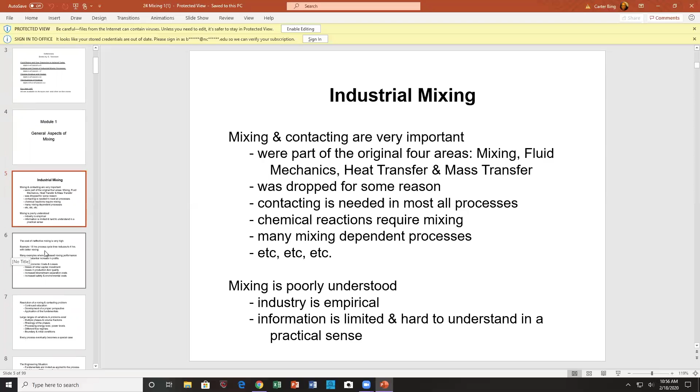The cost of ineffective mixing is very high. I ran a consulting job where they had an 18-hour cycle time. In that cycle, there were 2 powder additions to a liquid, and after they added the powder, they had lumps. It took 8 or 10 hours to get rid of those lumps.

Once they got rid of those lumps, further on down in the procedure, they added more powder and made lumps again, taking 4 hours to get rid of those. So overall, you had a substantial amount of time spent getting rid of lumps. The whole concept is: you don't make the lumps in the first place. You get the right equipment for the job, and you feed the particles in such that there's no way they can form lumps.

The company recognized this problem, and also recognized that they had to change their procedures and phase in new methods for adding powder to a liquid without lumps. It took them about 2 years to do that, which I find very astonishing. But they reduced their cycle time from 18 hours down to 4 or 6 hours or so.

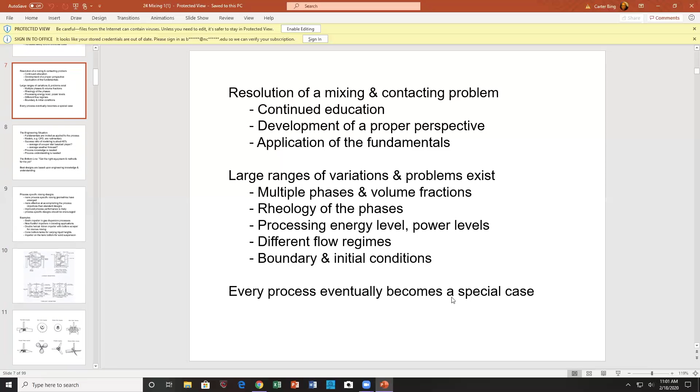So when you have this variation due to the lack of knowledge or information, every process eventually becomes a special case. Now that's counterintuitive, right? You want to have generality. But no, indeed, everything is a special case.

In an engineering situation, fundamentals are limited as applied to the process. The process is not well understood. You have CFD. CFD is fantastic. Don't get me wrong, I'm a great believer in CFD. But you can use CFD to understand your process.

That's true, but you can calculate a whole bunch of stuff that you can't measure. And actually, what you do with those calculations is the question. You have so much information, you don't know which is important and which is not.

Anyway, I used to say that the models are rudimentary. Maybe they're not that bad anymore. I would contend that the success ratio of modeling is about 40%. The average weather forecast—I don't know if you've tracked it or not—is about 40%, or take a look at a superstar baseball player batting 300, 1 out of 3. So even the best of the best, considering how much time and effort has been spent in predicting the weather and the computational capabilities, they're only coming up with 40%.

So process knowledge is needed, okay? And one of the ways of gaining knowledge is CFD. The other way is you go out and study it experimentally. And hopefully you go beyond knowledge and reach a level of understanding. Process understanding is necessary, is needed.

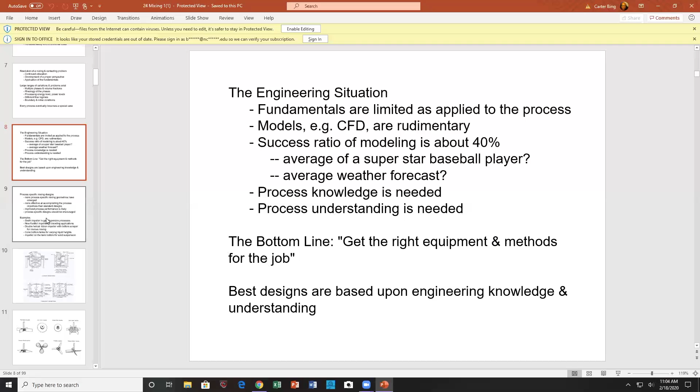Now this has given rise to process-specific mixing designs. They have emerged and are quite beneficial in increasing production or profits, effective at accomplishing the task objectives over and above the standard designs. Improved process performance is likely. Process-specific design should be encouraged.

What this is directed at is you have the concept out there of geometrically similar systems. Well, using geometrically similar systems, what you do is fall into a trap. Geometric similarity is a trap. Basically, you look at design.

There's two major elements to a design. One is energy level, or energy input, or operating conditions—that's one group of things. The other group is geometry. Geometry is very key in design. In fact, design effort to determine the proper geometry is very, very important.

So if you're looking for the proper geometry, then you cannot use geometric similarity. If you use geometric similarity, you have basically cut out a major design variable by fixing the geometry. Anyway, geometric similarity is taught everywhere—in the undergraduate program and all the fluids courses, you have geometric similarity, dynamic similarity, kinematic similarity.

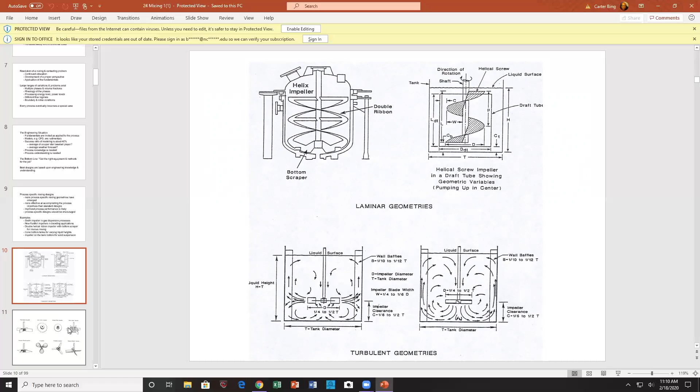Then the problem with radial flow impellers is they tend to stratify the tank. Say I had this one, and then I had another one up here, I would eventually stratify the tank, and that's not necessarily good for processing.

Okay, I have here a sawtooth impeller. These are often bent up and bent down, the teeth. And when it's bent up or bent down, it's called a Cowles impeller. Very useful impeller for dispersion.

Now here you have a simple disc. What's interesting about this simple disc is it's spinning around. It goes at very high RPMs, right? And it will have curls of vortices all along here. If you look, this is standard rotating electrode and electrolysis research. They are able to predict the roll vortices that form on this rotating disc, top and bottom.

And what happens is these vortices are all the same, so you've got substantial uniformity in the flow. As a liquid drop comes through those vortices and gets broken up—by the way, vortices will break up drops—you have very good drop uniformity. Since it's the same flow field no matter what, the material sees the same flow field, producing the same drop size.

Anyway, we also have the old disc style turbine. Basically, you don't want to use this impeller. This is much like a radial flow impeller, but this disc here is a baffle. It's a disc, but it's actually a baffle as well. It's mainly used for gas dispersion. You bubble gas below it, and the gas then goes out to trailing vortices off the blades.

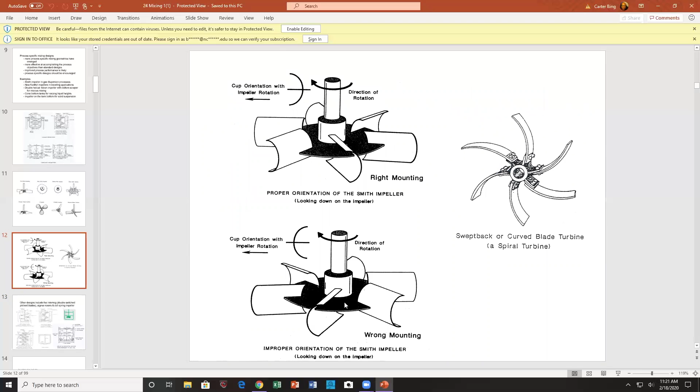So you have a whole host of geometries here. You need, if you go back to this one, swept back, proper mounting, and then a whole bunch of these. The old saying is, when in doubt, use a pitch blade turbine. The reason why is these blades can be unbolted and fit through a manhole, then bolted back up.

The hydrofoil can also have that design, and of course we have the famous marine impeller. All three of these are great designs. Some will have advantages over the others depending upon the application.

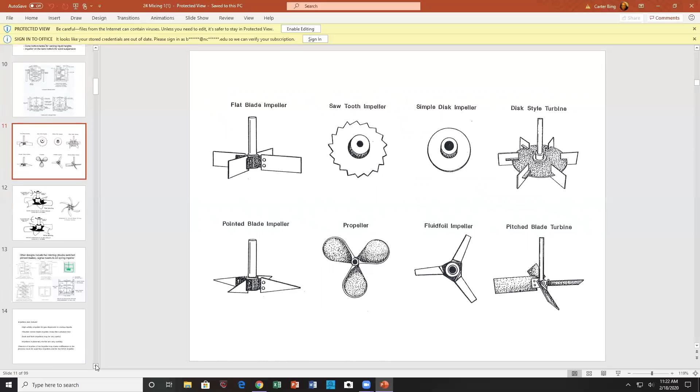Okay. Going back to those, and then further...

We have what might be referred to as a high solidity impeller for gas dispersion in viscous liquids. Now, you may or may not have a box fan at your house, but a high solidity impeller is the impeller of choice for a box fan—3 foot by 3 foot, with an impeller inside. It's called high solidity because you can't see through it. You always run into that.

Anyway, high solidity impeller for gas dispersion—I've had two stories about this. My friend at a very large pharmaceutical company said these things are fantastic for what they were using it for. Large area blades are very important; blade area can be quite a significant variable if you look at the mixing literature.

He said it really worked well. Another chap I ran into said this was absolutely terrible at gas dispersion. He put it in thinking it would be wonderful, and a couple of days later he discovered it's not doing so well, so they took it out.

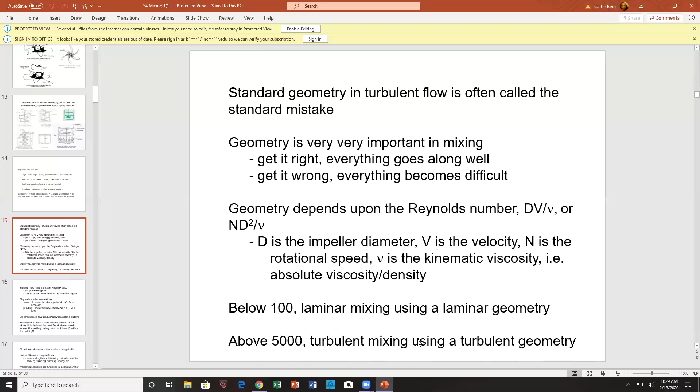Between the two, however, you have the fantastic transition regime, and the transition regime is often referred to as the problem regime. We can process in laminar flow without too many problems. We can process in turbulent flow without too much problem. The transition regime, however, may be difficult for you. It's often considered that the transition regime may be the failure regime if you're not quick on your feet, so to speak.

And just for kicks, we do a quick Reynolds number calculation. I have a 1 meter diameter impeller going around 1 revolution a second, 60 RPM, and the Reynolds number is a million, so 10 to the 6th.

Then I switch it out. I have pudding. I forgot to mention viscosity up here. Kinematic viscosity of water is 1 times 10 to the minus sixth, meters squared per second, I think, in which case you can do the calculations.

Pudding, on the other hand, may be 1,000 times greater viscosity than water. So again, you have a 1 meter impeller rotating at 60 RPM, right? You have a Reynolds number of 1,000. So you go from 1 million, which is probably the Reynolds number of milk, and as you cook your pudding, the pudding particles swell up and significantly increase the viscosity. So you have a big difference in flow between milk and pudding.

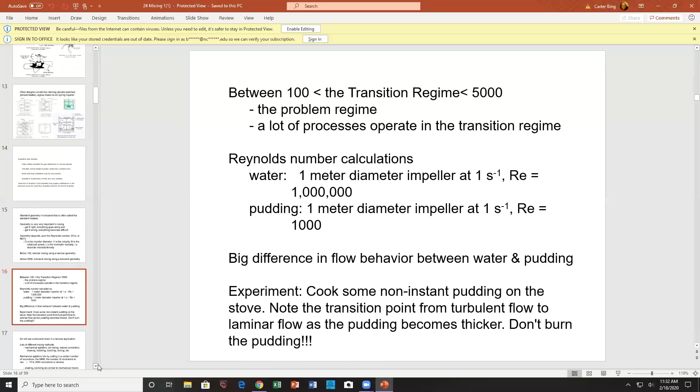However, if I come along and get smart and get a spatula, which has a long flat edge to it at the end, I go along and scrape my pudding. I'm not touching it at a single point, I'm touching it all along the length of that flat edge. So there's an example of cooking with an improper geometry leading to your pudding being burnt, i.e. the spoon, versus using a spatula, a more effective device in scraping the surface, and I don't burn my pudding. So, a change in geometry has a significant impact upon your pudding.

Now, that's extremely important to have unburnt pudding. Anyway, again, we reiterate, don't use a turbulent mixer in a laminar application. You can see a number of companies using turbulent mixers in a laminar application.

Need I say which ones of you are out there? You can confess up if you wish. But, it's like everywhere. Okay, it's all right, gives me something to talk about.

Lots of different mixing methods out there. I don't know if you realize it, but most of the mixing companies want you to focus on their mechanical agitators. You forget there's jet mixing, there's natural convection mixing, there's shaking and tumbling and bubbling and boiling, all kinds of these things mix, right?

In, say, processing, making steel, they have this big ladle full of molten metal. You can't very well put an impeller in there because the molten metal would simply melt the impeller. So what you'll do is sparge with a lance, probably a ceramic lance of some sort, sparging with oxygen, maybe, if you want to have a real good time, or an inert gas to cause the mixing to go along.

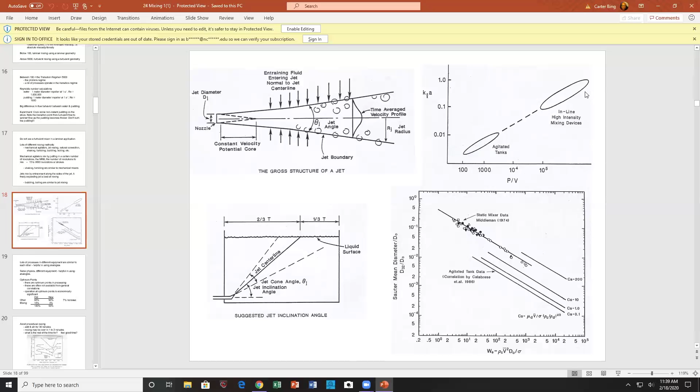Lots of processes in different geometries are similar to each other. It's useful. You have the same physics occurring, but different equipment, different energy levels, different geometries, different power levels, but they all line up. It's interesting how that happens.

Optimum points. Now, there's always optimum points, and this may actually be a justification of research in mixing. Mixing is often taken as a sort of guarantee. It's not. Mixing does not have to occur. Turbulent mixing is often so easy that you don't necessarily pay any attention to it. So I have an old process: 90% of the time is spent elsewhere, 10% of the time is spent mixing.

So if I go to a new process where I got some mixing hotshot come in, you have a new design. The 90% didn't change much, but the new design dropped your mixing time down from 10% of the total down to 3%. Add up the numbers, and you find that I have a 7% increase in production. Now, that doesn't bother much people in some cases. In other cases, that might be significant to you. So operations at optimum points are economically significant. These are not available from the general correlations, optimum points. So it gives you an example.

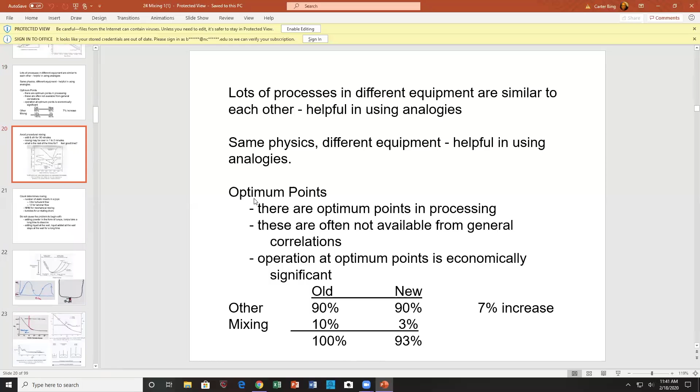So let's go here. You've got to close your eyes and your ears now. This is the reactor that the government uses to make plutonium. Okay, close your eyes. Anyway, just kidding.

This is mixing in a slab tank. I was using up-down mixers, so this thing goes up and down. I varied clearances, and I even had a slant mixer in there. All this is summarized with Chris Ramsey, AICHE.

In 1989, we have the homogenization number. That's a fancy word for number of strokes. This is an up-down mixer, so I'm not looking for RPM, I'm looking for strokes to get the mixing capabilities of these things. You put in a dye and count how many revolutions it takes before it becomes uniform.

So we took videos and noticed there was a particular width to tank thickness ratio. The tank thickness was pretty much fixed at 4 inches, but the width varied, at 0.75 there seems to be a minimum. The number of strokes to mix was roughly around 20 here.

And way up here it's 60. So literally, the whole process mixes either way, but now I can mix it at 60 or 65 strokes and reduce it down to 20 strokes if I use the proper or better geometry. This worked, right, it gets the job done, but this one does it with higher efficiency.

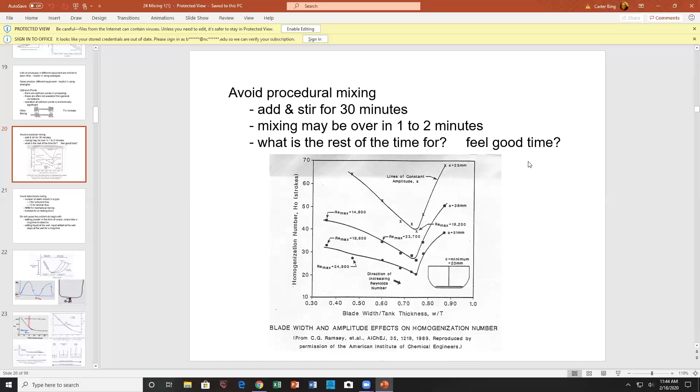So going forward, you could probably say that lots and lots of industries are over-mixing simply because they have a feel-good time about themselves. Anyway, you need to pay attention to count. Count determines mixing.

An example would be a static mixer. Typically you need 3 static mixers to mix in a turbulent zone, and videos will show you that. If I go to laminar flow in a pipe, I don't have good mixing with laminar flow. It may take 12 static mixers to mix for laminar flow.

And of course we have the number of revolutions to mix for mechanical mixers, and we have drums, rotating drums that tumble. It's the number of tumbles that is important, not the time. Time is really a fairly odd thing. To say a process is over with in a certain amount of time is probably a gigantic misstatement. Let's give you an example.

I have some clothes I want to dry, and I want to put it in a dryer to dry. So I put the clothes in the dryer, but I don't turn on the tumbler action, I just pass air through it. The hot air goes through, and after 40 minutes of drying time, the clothes are not dry at all.

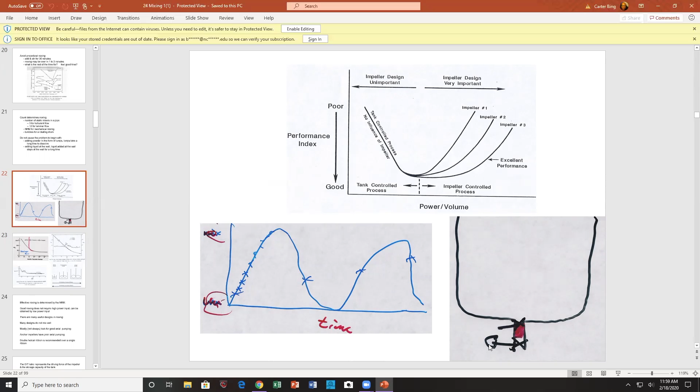Anyway, moving along — here's another picture I've taken from Jim Oldshue. I really like Jim, he was a nice guy. Going from small scale to large scale, you're increasing volume effects, so you have significant increases in volume, which I suspect is not very well appreciated.

Now, if I have a problem in the plant and want to scale down, as I scale down I get more surface effects. So increasing in size, I get volume effects appearing; decreasing in size, I get more surface effects happening. Case in point: I have foaming in this small reactor, but a large reactor may not have any foaming whatsoever.

Foaming is a surface process of sorts. So I have processes which change with size - that's another thing you should recognize. Processing should change with size, and if you're using a laboratory procedure at larger sizes, you should reanalyze laboratory procedures, because the large-scale process is quite different than the small-scale process. Large-scale processes are sluggish, take a long time. Small-scale process, quick and done.

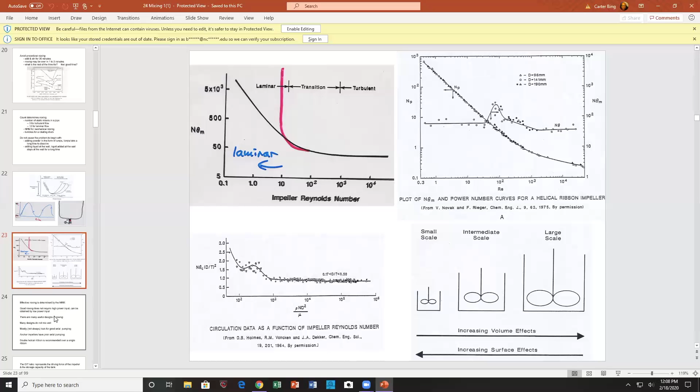Effective mixing is determined by the number of revolutions to mix. Good mixing doesn't require high power input - this is very true, it can be attained by low power input. There are many useful designs, and many designs that don't mix. You're always looking for good axial pumping. Anchors are not good; the helical ribbon is recommended.

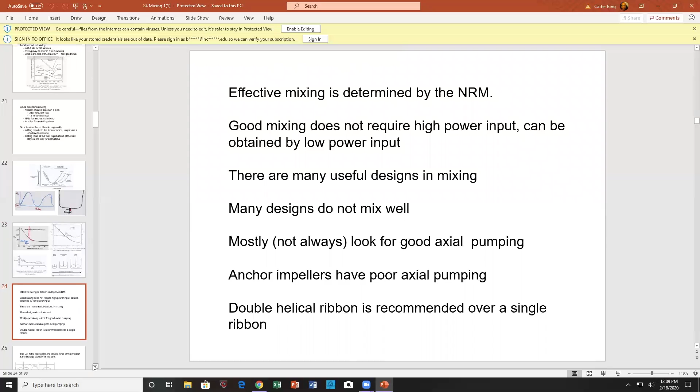You have a small diameter-to-tank-diameter ratio, a small D over T ratio, and so you form a well-mixed cavern. The outside is a stagnant region. You can think of this as what happens when you're making whipped cream - you'll have a well-mixed region around the impeller, and further out, due to yield point or whatever, you have no motion.

Now then, if I go to a full-tank impeller, a higher diameter-to-tank-diameter ratio, the cavern grows larger as the impeller grows in size. So eventually, if I go to a full-tank impeller, I have the entire batch well mixed.

Lots of polymer companies have used turbulent mixers in a laminar application, and typically what you wind up having is two different reactors - one that's well mixed, and another part that's undermixed. So you get one size of particles produced here and another size produced there, giving a broad distribution of particle sizes and/or emulsions or polymerization. If you go to a full-tank impeller, you'll get a much tighter distribution.

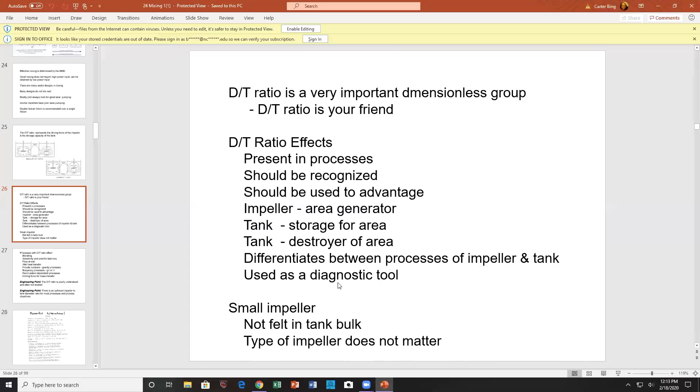You can expect D over T ratios to matter in blending, selectivity, yield for fast reactions, flow at the wall, heat transfer, suspension problems, buoyancy, solid submersion problems, recirculation dependent processes, and driving force for mass transfer. The D over T ratio is poorly understood and not studied.

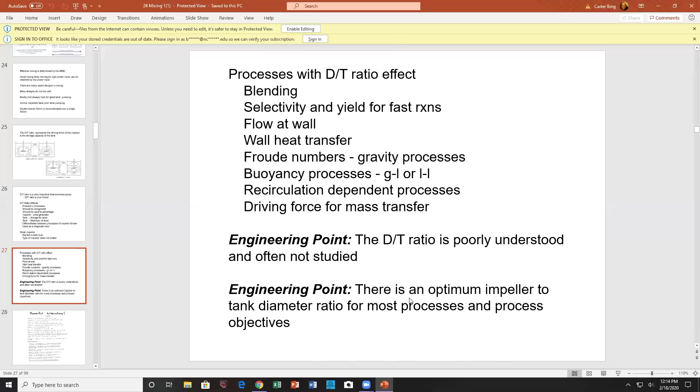There is an optimum impeller to tank diameter ratio for most processes and process objectives.

About the technical literature - there's a whole slew of mixing articles out there. I read about 2,000 articles to write my first book, reading one a day and summarizing it a page at a time. After reading that many, you get a fundamental understanding of the technical literature, and it's extremely valuable.

I was visiting a specialty chemical company in Philadelphia, and this educated chap, a good engineer, was describing what he was going to be doing for the next 6 months. I reached in and pulled out an article I had, because I was reading one a day, and explained: here's your results. It had already been done, already published, so I handed him the information. I thought that was kind of cute, and I appreciated the chap, but never underestimate the technical literature.

I like to use the technical literature to solve mixing problems, so you need to keep current. Of course, upper management may not appreciate you wasting all your time educating yourself.

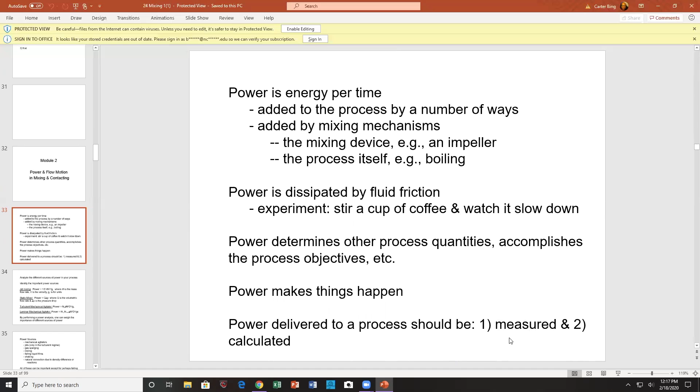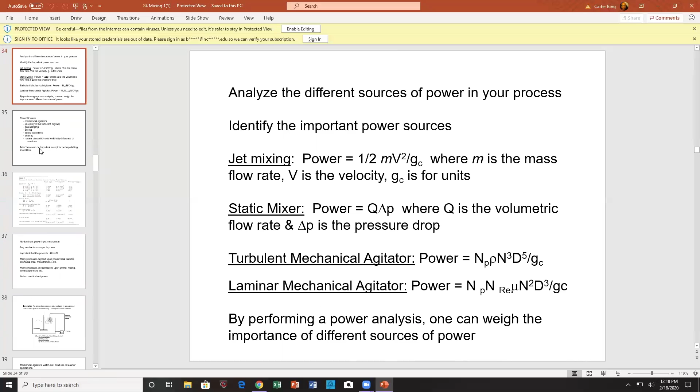You should analyze the different power sources in your process and identify the important ones. You have jet mixers, mechanical mixing, boiling operations, gas sparging operations. By performing a power analysis, which is never done - probably never even heard of - one can judge the importance of different power sources: mechanical agitation, jet, gas sparging, boiling, falling liquid film, shaking, natural convection.

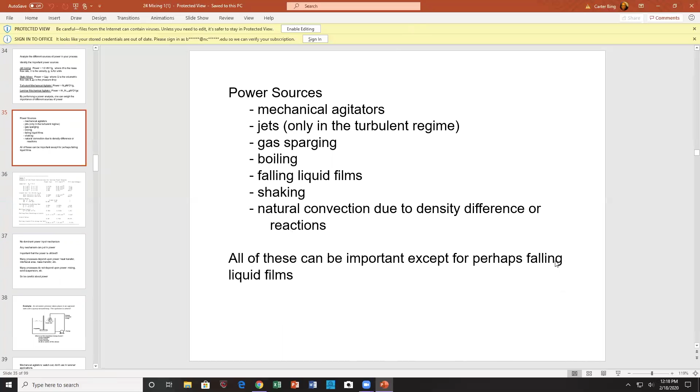All of these can be important, except for falling liquid film - that's pretty desperate. Anyway, you do the calculation of power input.

You should do a power analysis. For those of you who are engineers, a power analysis is typically done for pipelines - pressure drop through fittings, pressure drop through a heat exchanger. You're doing a power analysis because you take that pressure drop times volumetric flow rate, and that gives you power. So when calculating pressure drop in pipes, you're doing a power analysis of that piping system. By analogy, I carry that over into an agitated tank or into a process, and I measure power by the various power input measurements.

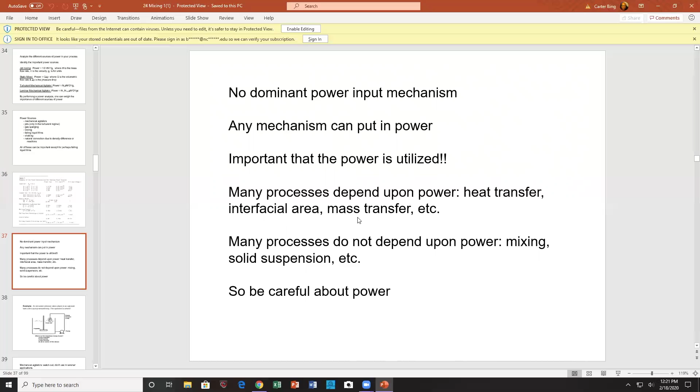Here's a question I got from one of the participants in my short courses. The chap asked me - he was making an emulsion - what could he do to improve the dispersion capabilities of the impeller. He was doing liquid stuff. He asked me what he should do to the impeller. Well, the question is, where's the emulsion being made?

Is it being made around the impeller? Is it being made in this pump? Is it being made in both places mixed, or is it being made by this feed jet as it comes through? There could potentially be an emulsion being fed at a high pressure drop through a nozzle - you could substantially make drops here. So you have three places where drops could be made. Power analysis might help you understand which might be the dominant power mechanism.

Basically, you're looking for trailing vortices, and high shear zones typically come from vortices or high-speed jets.

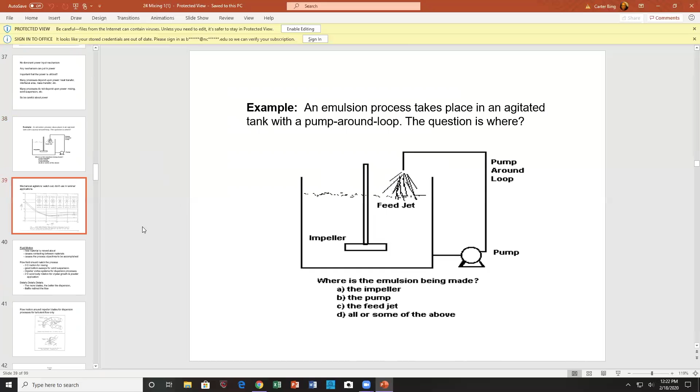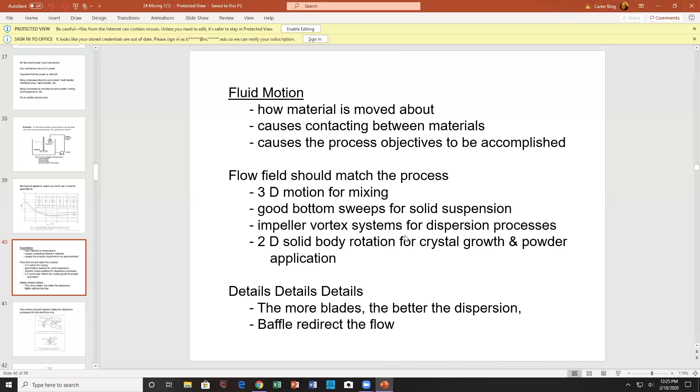I did that for moldable impeller blades for a gas dispersion process. Anyway, we have this lovely picture by Smith and Van Riet - they have their lovely vortices being formed behind the impeller blade. The front of the blade actually does very little; it's the back of the blade with these vortices that does the fantastic processing. And I've added the high-speed jet in between these two vortices as an improvement.

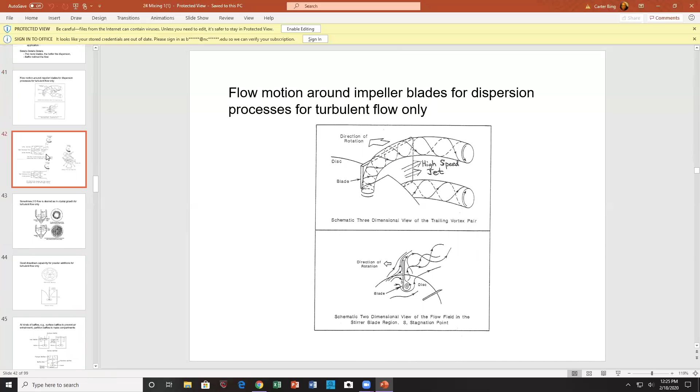So if I go along, these vortices are in flat blade impellers with a disc there, and even for a pitch blade turbine, and they also are available with hydrofoils and propellers as well. You've got some really sensational videos on YouTube about vortices forming off of boat propellers.

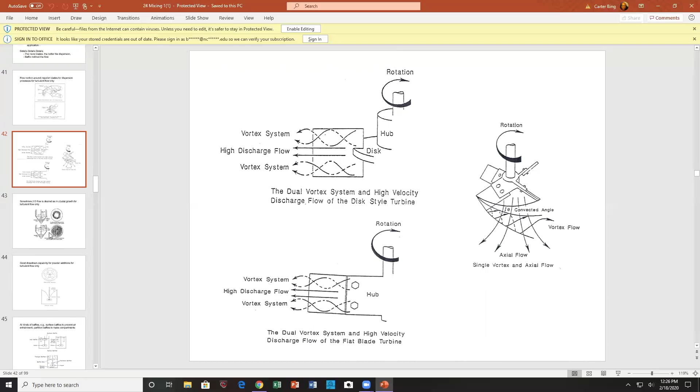Anyway, this is a gift. I appreciate the person who gave it to me. This is coming from a pharmaceutical company. I won't tell you the name, but it's in North Chicago. Anyway...

Two-dimensional flow, this is given during the class. The person stated that they had run a cone bottom study and they were watching the volumes of liquid, and it was a crystallization process. So they were adding crystals to what amounted to being a solid body rotation phenomenon. There were no baffles. It was not turbulent, but it wasn't quite laminar either, so it's probably in the transition regime.

Anyway, it went around and around. No real breakage going on. The stream was feeding back upon itself. In turbulence, this would not happen. So you had solid body rotation. The crystals were fantastic, the crystal growth was fantastic. They were able to filter it easily.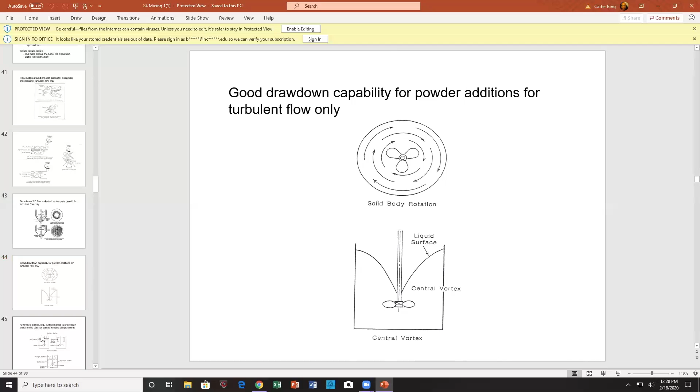Baffles - who's got the baffles? Just to make some comments: all kinds of different baffles, partitions, bottom baffles. There's a paper by Nagata and somebody. The Japanese are very good.

Anyway, that paper said bottom baffles help in solid suspension. What I found was just the opposite - the bottom baffles actually hinder. They trap various debris in bottom baffles. So anyway, the only baffle here I would really pay attention to is surface baffles.

Surface baffles are quite interesting because you can calm the surface down. You can also pump up against the surface baffle, and by having a surface baffle you may lower aeration. Air is being pulled into the batch - if you have a surface baffle there, you may be able to prevent that air entrainment.

The cosmetic industry oftentimes has a whole bunch of air being pulled into their processing, in the lotions area, resulting in long processing times. I recommend they put in a surface baffle, possibly a floating surface baffle. Of course, you've got to worry about that baffle going through the impeller. Anyway, I gave them pictures.

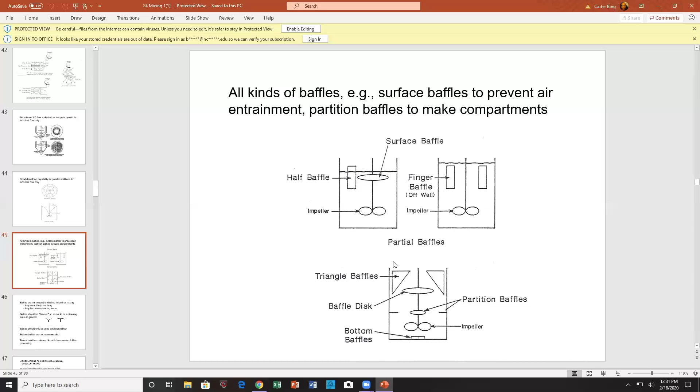So these other baffles are just drawn here to keep you entertained - no, I'm just kidding. Baffles are not needed in laminar mixing. They're terrible - they become a cleaning issue and they're not helpful in mixing. In turbulent mixing, you might try a dimpled baffle, so as not to be a cleaning issue in general. This baffle - there's no place where the particles... this is a tank wall, right?

Tank wall. There's no place where the particles can be trapped. Here we've got a zone that traps the particles and hence becomes a cleaning issue.

I was talking to a chap, and he said he didn't care about any of the things I was talking about. He essentially said all he really cared about was whether he could clean the process. Thought that was kind of amusing. He didn't care about much, just so long as he could clean it easily.

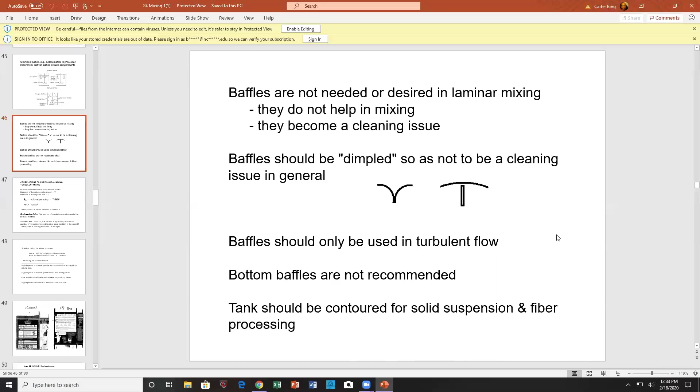N theta, there's been a lot of correlations based upon N theta. It's not a new phenomenon, it just hasn't been named. It can be called the number of strokes, the number of revolutions, or a homogenization number, all kinds of things. Typically, for an agitated tank, it's T to D to some exponent, 1.5 to 2 — the number of revolutions to mix.

So let's do a quick calculation. K is 5, A is 2, we're at 45 RPM, and D over T ratio is 0.3. So what do we got here? Put those all in and we quickly find — this is an exponent, so it's 5 times 3 squared, which is 9. So we have 45 revolutions. That's not a time sign, that's the exponent that did not get exponented. So at 45 RPM, revolutions is 45, so we get it in 1 minute. So the mixing time is 1 minute.

So quickly we find high rotational speeds mean low mixing times, and low rotational speeds lead to long mixing times. High rotation is not necessary to accomplish mixing.

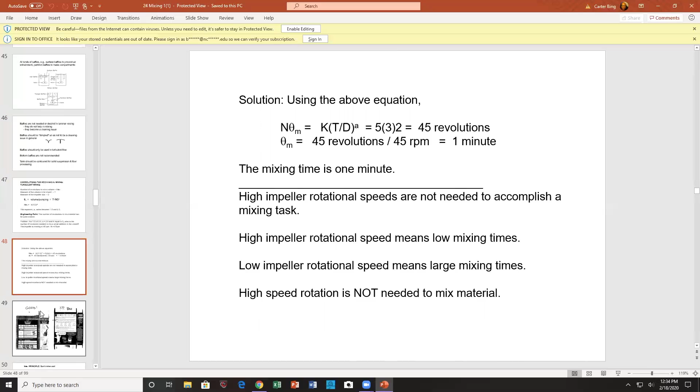So here's another experiment I want you to do. Go to the grocery store and get some cake mixes or fudge brownie mixes — in this case, Pillsbury hot fudge brownies — and read the procedures. One will say beat the mix for 40 strokes, another will say beat for 2 minutes at high speed with a mixer.

So here it's 40 strokes or 60 strokes, here it's 2 minutes at high speed, or by hand for 2 minutes. And all that means — high speed for 2 minutes, by hand for 2 minutes — means you have a high speed hand. Just joking here.

So one is correct and cites revolutions, the other one is just telling you time.

I want you to do this mixing experiment yourself: mix pancake batter Saturday morning, and put in five or six phases in the pancake batter. There's oil, perhaps, there are egg whites and egg yolks, so that's three. You add powder, and when you add powder, guess what you also add? You add air. So whenever you're adding solid powders to a process, you're probably also incorporating air.

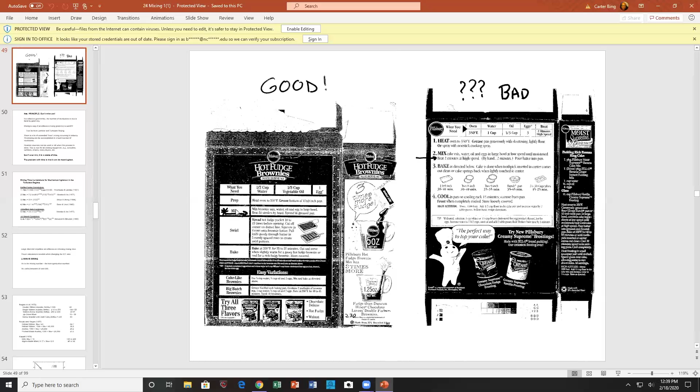A mixing principle: don't mix more than needed. So effective geometry means the number of revolutions is fixed by geometry. Mixing is easy if you have an effective geometry—true both for laminar and turbulent flow. There's a lot of unneeded mixing occurring in industry. Processing can be accomplished by a fixed number of revolutions.

That means you need a rotation counter, right? You need a power meter to measure power, and now you also need a rotation counter. This is true for any rotating equipment—extruders, tumblers, grinders, rotary dryers—you should look at the various processes. Don't overmix, it's a waste of time. The problem with time is it can be quite meaningless.

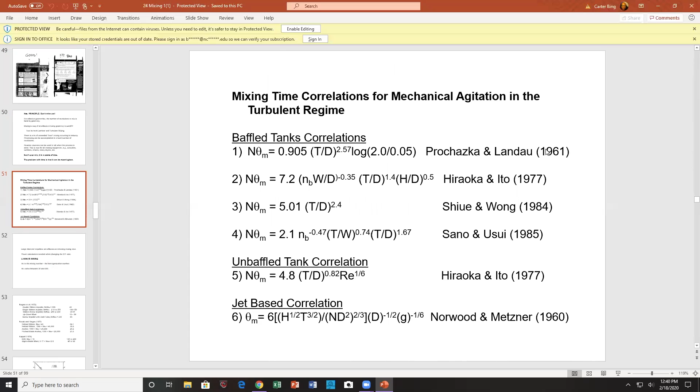Anyway, we have a bunch of N theta values here for mechanical mixing. These are all very similar to each other. We have some Japanese, I think some Chinese, and some Czechoslovakians in there.

Large diameter impellers are effective at reducing mixing times. Of course, they're expensive too—the helical ribbon is expensive, don't get me wrong. But if you buy the right equipment, you get the job done right. D over T ratio, very important.

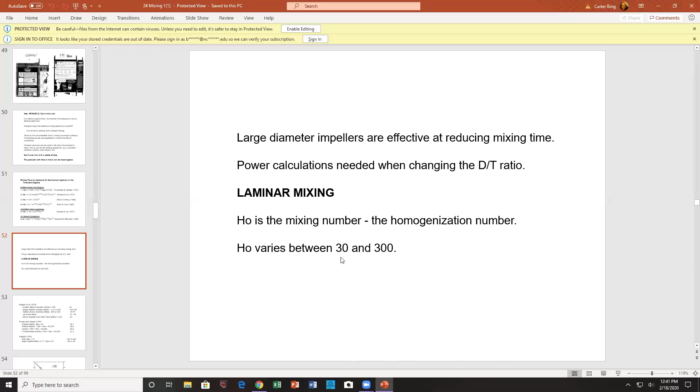For laminar mixing, the homogenization number varies from maybe 30 to 300. Here's a listing of them. Whereas the 16 up-down mixer—the back-and-forth or up-down mixer—takes 16 revolutions and it's mixed. To mix sugar into coffee, it's 2 or 3 revolutions with a spoon, mind you, with a spoon. If you use a plastic straw, it may take several days, or not at all.

So we have the Czechoslovakians, we've got the Japanese—Nagata was sensational. Post-war Japan, 1956, he was doing research in mixing far exceeding anything in the United States at the same time. They are really spectacular. Japanese are obviously good at lots and lots of things. Americans, not so much—Americans like to play catch up, which we do very well, by the way.

Germans too—here's some Germans, the Sigma mixer, the Intermig. The Intermig is an interesting impeller. Notice that we give Reynolds number ranges in here. These are probably the wrong way of listing them in terms of Reynolds number—these are classical Reynolds numbers. What we should be doing is taking the power number defined for turbulent flow, multiplied by the Reynolds number.

That product is the power number for laminar flow. There are different power numbers—one for turbulent flow, one for laminar flow. Laminar flow has viscosity as the major variable. So when they state a value like 330, it's really meant to be a statement of power number. So: power number, power number, power number.

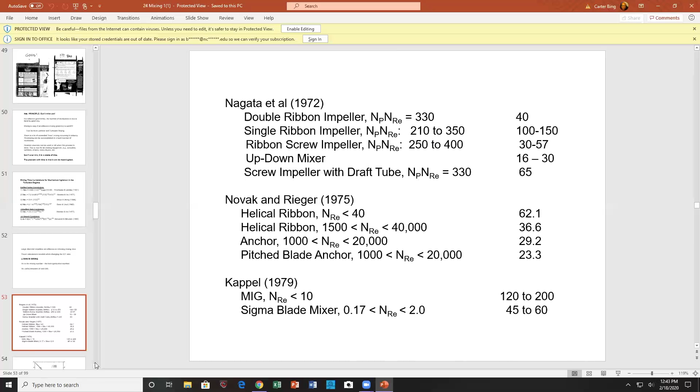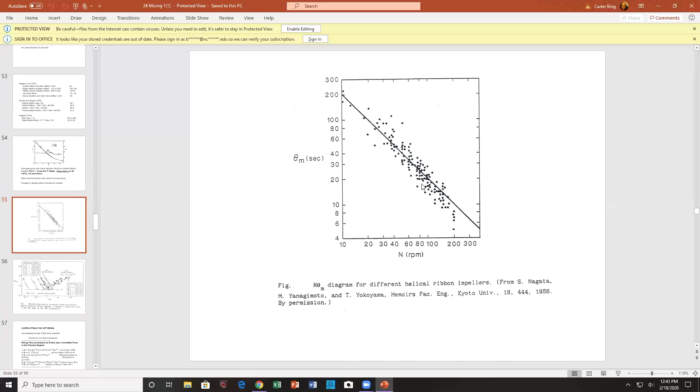And here is our famous Czechoslovakian universal mixer problem in the transition regime. This is some of the original diagram from Nagata, Memoirs of the Faculty of Engineering, Kyoto University, 1956. This is sensational stuff: mixing time times n theta equals a constant. And the Japanese, since they had Nagata, also continually produced good stuff in the area of mixing.

This is mixing miscible liquids with different physical properties with a helical ribbon impeller, I suspect. I don't have it here, shame on me. But we have different volumes, volume A to volume B, different viscosity ranges. So we have a whole bunch of different viscosities and different volumes. Up here is another volume, different viscosities. And what they found was three patterns: this pattern here, that pattern there, and some pattern along here.

So you can sit there and calculate, this is n theta being 44. You have Reynolds number ranges. But the important thing to recognize is they're using a universal mixer, i.e. a helical ribbon. So if I put a band on this, and I tend to be an engineer rather than a scientist, this is 1,000. So anytime revolutions are below 1,000, I can consider that a well-mixed or good mixing design. So I go from anything like 50 or 44 up to 1,000 as a range of good mixing.

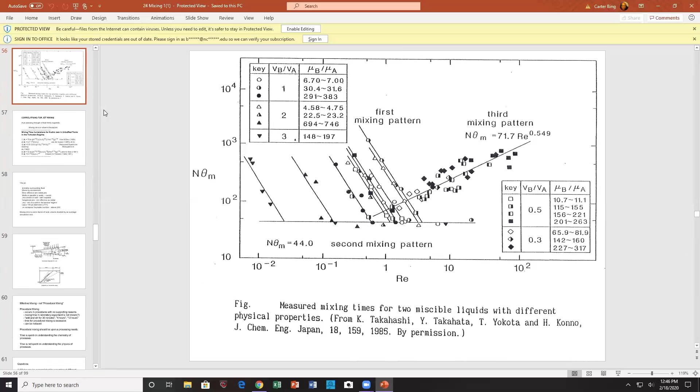Jets mix by entraining surrounding fluids, mixing by entrainment. The most effective are radial jets. You want to avoid walls, parallel to the wall. You do not want to attach the jets to the wall; jet attachment is not desired. You need it to expand fully, if I'm trying to mix the overall tank. Now, if I'm trying to clean the tank bottom, then I want the jets on the tank bottom.

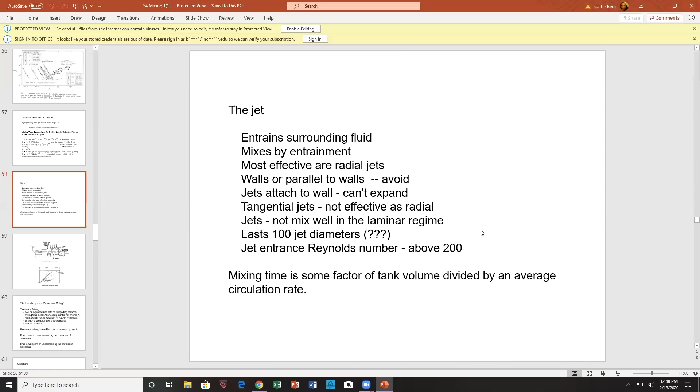But there you go, the important thing is major differences in scale-up between laminar and turbulent. In turbulent flow, you'll have jet mixing everywhere in your process. In laminar mixing, however, you will not have jet mixing at all. There's got to be a reason for the mixing.

Anyway, continuing on, you do not want procedural mixing. You see this all the time, it occurs in procedures with no supporting reasons. Science does not end with the chemistry; science also carries over into the procedure. There's got to be scientific reasons for different things, not just feel-good times, like add and stir for 30 minutes, 4 hours, 12 hours. 8 hours is typical because that's the workday, maybe for some. Time for procedural mixing is excessive and should be reduced.

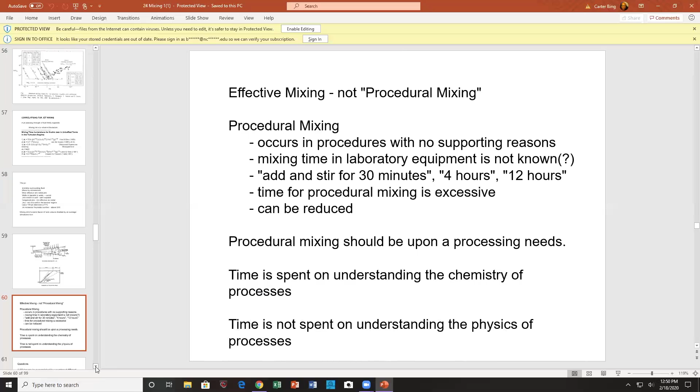Procedural mixing should be based upon a processing need. Time is spent on understanding the chemistry of the process, but time is not spent on understanding the physics of the process. That's very interesting to know - lots of time is spent on the chemistry, but not a lot of time spent on understanding the physics. Voila, there you go. And up here we have some questions for you.

Jets don't mix in laminar flow. So let's take a quick break here.

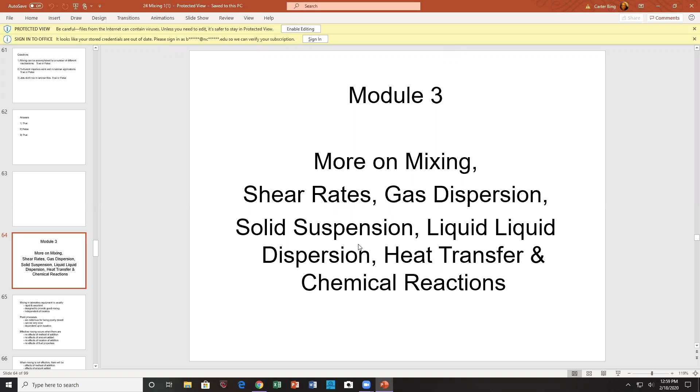Okay, let's take a look at more about shear rates, some comments about gas dispersion, solid suspension, liquid dispersion, heat transfer, and chemical reactions. Anyway, the laboratory is typically excellent in the mixing area - rapid, excellent, designed to provide good mixing, independent of the location. Typically, the laboratory people don't know that poor mixing exists. Plants are notorious for being poorly mixed, can be very slow depending upon location.

So when you have effective mixing, you have no effects of method added, no effects of the amount added, no effects of location, no effects of fluid properties. Okay. So if we have ineffective mixing, then there'll be effects of method added, amount of material added, location, and fluid properties.

So when I was studying mixing, I had young children, and they would have their nursery rhymes. So this is the nursery rhyme I developed for mixing: when mixing is good, it is very, very good, and when mixing is bad, it is very, very bad.

A friend once stated, we have found the three most important effects of mixing on our reactors are feed location, feed location, feed location. They were involved with transition mixing for sure.

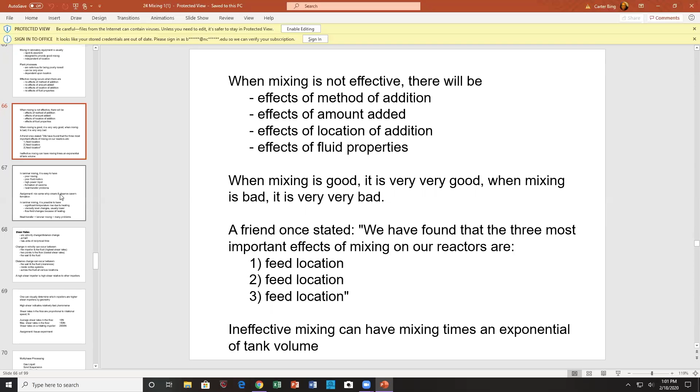Laminar mixing - it's easy to have poorly mixed fluid motion, high input, formation of caverns, heat transfer problems. I gave you an example, basically, of wanting you to mix some whipped cream and observe the cavity formation. Laminar mixing is possible to have significant temperature rises due to heating.

A viscosity level changes on you, usually lowering, and flow field changes because of heating, which is interesting. We have the fundamental equation from George Klinzing, University of Pittsburgh, way back in the 1970s - great guy. Anyway, he had the equation: heat transfer plus laminar mixing equals many problems. There you go - heat transfer and laminar mixing equals many problems.

If you cook eggs on the stove, if you don't do surface renewal, don't break up the laminar mixing that might be taking place with the complex egg yolk and egg whites, then you can burn and scorch your eggs. Anyway, just a quick example.

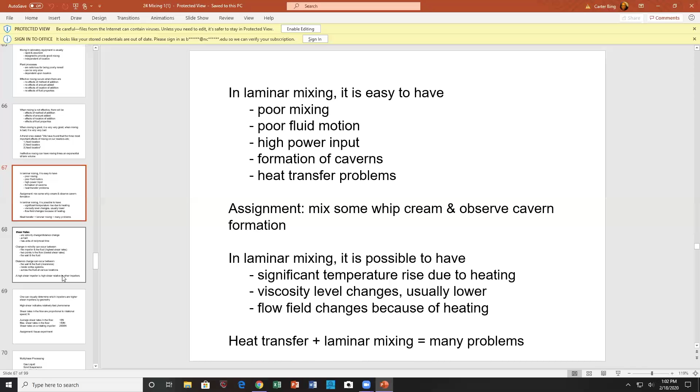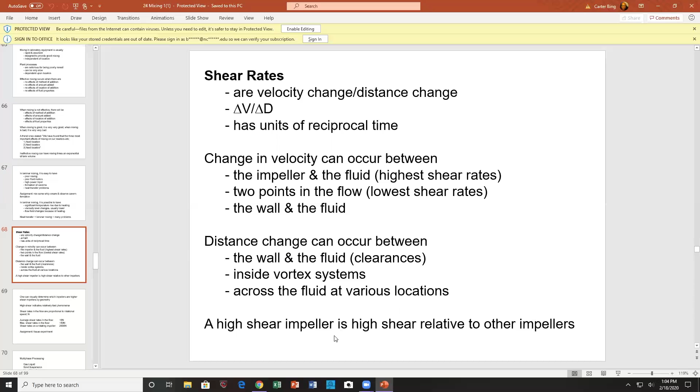When we talk about a high shear impeller, it's high shear relative to other impellers, okay? One can visually determine which impeller has a higher shear by just looking at the geometry. High shear indicates relatively fast phenomena - it has 1 over time to it, and if you flip that, that gives you an estimate of how long things may be happening.

Shear rates in the flow are proportional to rotational speed. So average shear rates in the flow might be 10 times the rotational speed. Maximum shear rates, in the vortex, might be 150 to 300 times the rotational speed. Shear rates on the rotating impeller may be 2,000 times the rotational speed.

Okay, to give you an idea of the shear rates on the rotating impeller, think about a table saw. You can get very close to that table saw without being harmed, and shear rates are very low.

As soon as you touch the table saw, the shear rates go through the roof. So I want you to do a tissue experiment. Hold a tissue out the window at 60 miles an hour, and it doesn't take long for the shear rates to destroy the tissue. That's like a wall-bounded shear rate, anything that has a wall or a solid surface.

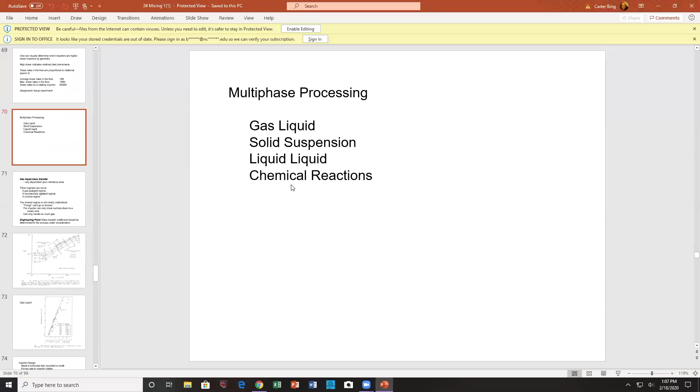We talked a little bit about gas dispersion, solid suspension, liquid-liquid, and we'll end with heat transfer and chemical reactions. Now let's look at gas-liquid mass transfer.

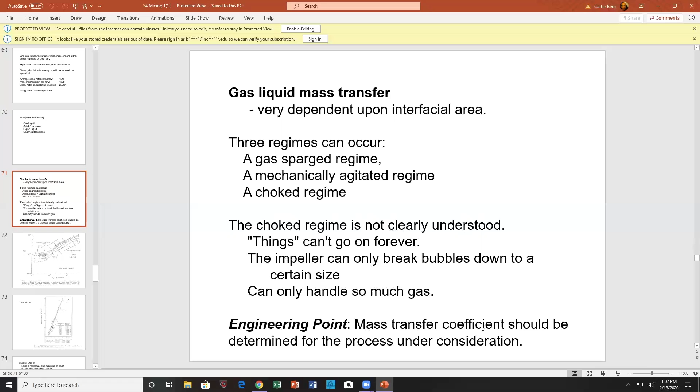It depends very much upon interfacial area. I contend there are three regimes: a gas-sparged regime, a mechanically agitated regime where the impeller disperses the gas, and a choked regime. The choke regime is not very well talked about or clearly understood. Things can't go on forever—the impeller can only break things down to a certain size and can only handle so much gas. So the mass transfer coefficient should be determined by the process under consideration.

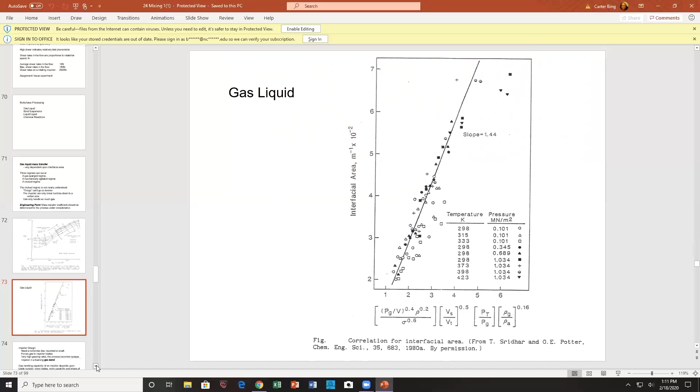Now, I studied this. I've been preaching this an awful lot over the years. More impeller blades, the better. So I did a study changing the blade number from 6 to 12 to 16 with this new technology of 3D printing. I printed up myself some impellers, and I got a graduate student. And more blades do increase the performance up to a certain point.

And the exponent on more blade number is 0.4. So whatever the blade number is from the original design, I go up. Blade number, the effect ratio-wise will be 0.4 exponent, which is not 1. It's not proportional to blade number, but it is affected by blade number to a 0.4 power.

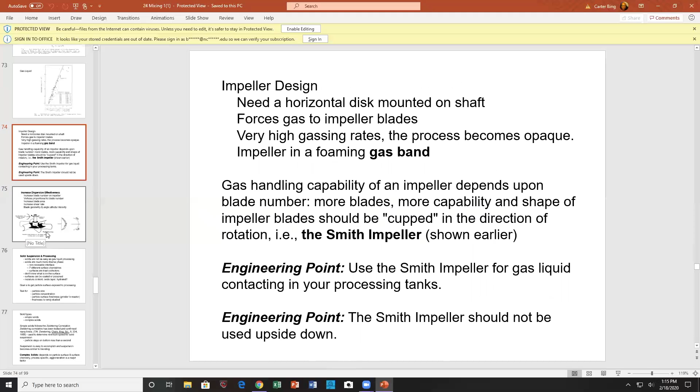Anyway, did we get this one? Smith impeller should not be used upside down. That's very important because when you flip that sucker, you always have to stop and think about whether it actually is true or not. If I flip this thing and mount it, I get the wrong mounting. Anyway, I got to watch out.

It's always cupped in the direction of rotation. It's something that you got to check for. I like maintenance people, but they can change your process. Okay.

By the way, a lot of the impellers used in fermentation batches still use the Rushton impeller and 2 pumping impellers. It would be a smart move if they had 3 Smiths instead. In other words, at the bottom of the tank is usually a flat blade impeller, a Rushton - they should replace it with a Smith. Halfway up, or a third of the way up, they may have a pumping impeller, a hydrofoil - you should replace that with a Smith. And the top impeller should be replaced with a Smith.

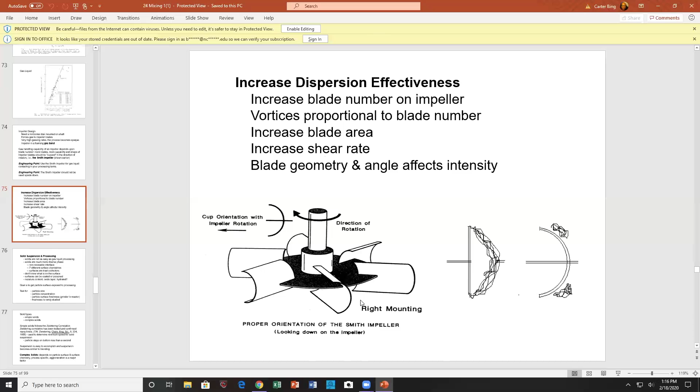The idea would be that you gas sparge each one of those. Right at the present time, fermenters are gas sparged to the Rushton impeller on the tank bottom, and the other 2 are pumping impellers. That's not necessarily a good design. A better design would be 3 Smiths where you gas sparge each one of those. Same thing for chemical reactors.

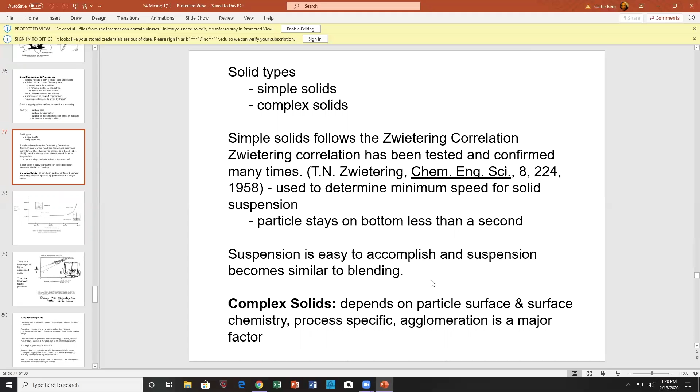So we have simple solids, like sand without any moisture - very little effect of surface chemistry, free-flowing, following the Zwietering correlation from 1958. Basically, the idea for solid suspension is that these free-flowing solids stay on the tank bottom less than 1 second. Suspension is easily accomplished, and suspension becomes similar to blending. It's kind of interesting - so we have the Zwietering correlation.

It looks like this. However, Zwietering - pay attention to the slope here. The Zwietering correlation has the effect of solids concentration to, I think, the 0.13 power. But up here, with heavy suspensions, the slope of particle concentration may be a 0.5 exponent.

So we have the condition of solid suspension here, and here when the impeller is buried into the solids, and then we have solid-solid reactions or agglomeration going on, all bets are off. So solids is a really difficult area to work in.

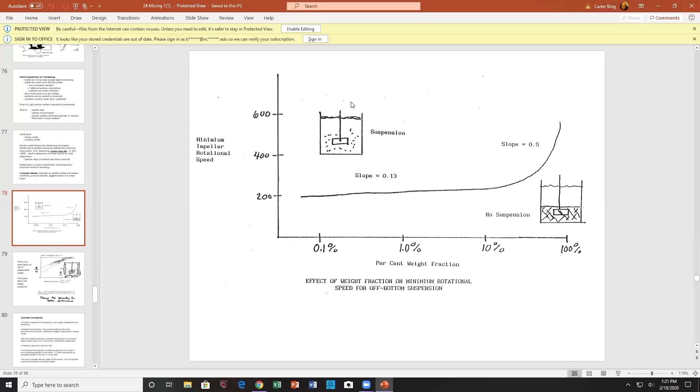Even sand becomes non-free flowing. If I take sand on the beach and make castles with wet sand, obviously sand is not free flowing, because of the moisture content. However, dry sand is free flowing. And we have this very famous work here.

Generally speaking, with homogeneity in solid suspension, there's a claim that there's always some small layer of clear liquid up top. That's not true. They topped it out at 0.95, thinking that there is always going to be some clear layer at the surface. That's not true. If I pump up to the surface and have a rolling surface up here, the surface concentration of solids will be what was pumped up to it. So generally speaking, whenever you deal with solid suspension, there is a gigantic clear layer. If I have complete homogeneity, that will disappear, and I'll have solids throughout the entire tank.

Typically, you calculate the modified Froude number, and you can see how much suspension you'll obtain in the tank, or how big the clear layer is. This is a first-class pain in the neck when you're looking for complete homogeneity.

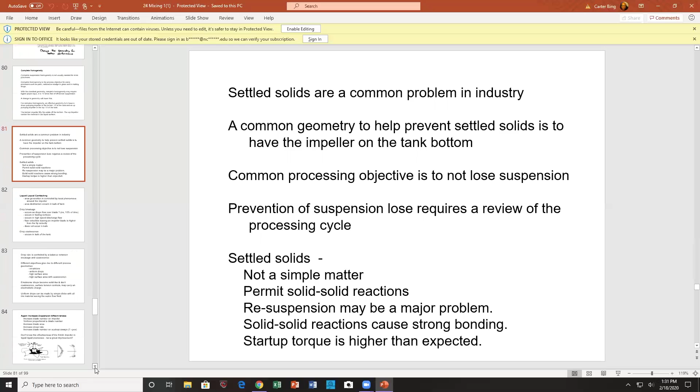Remember, we were talking about the spring impeller buried in clay, in the clay industry, that was in Georgia. Anyway, liquid contacting.

Area generation is controlled by the impeller. Area destruction occurs in the bulk of the tank. So you have generation and destruction going on.

There's a dispersion sequence. So what this tells me is the more vortices I have, the more high-speed jets I have, the more dispersion I will get. Again, the 0.4 power - going back to this...

Where was I here? Here we go. Drops flowing over the blade break up about 10% of the time. How do I know that? Well, I counted the number of drops breaking up. The true breakage or dispersion occurs in the vortices and the high-speed jet.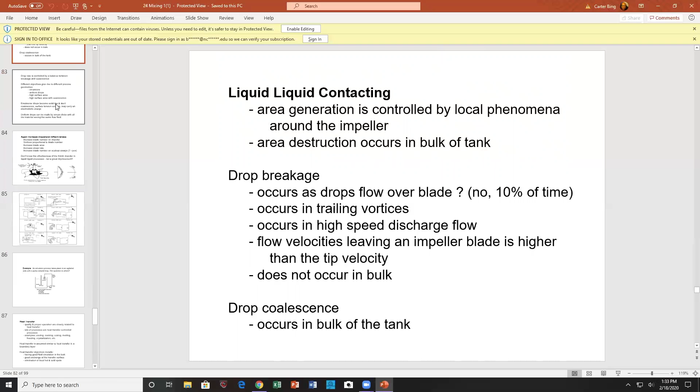It's sort of like the flow hits a brick wall - the brick wall is called the bulk of the tank. Now, in the bulk of the tank, you have drop coalescence. So you have a fight between drop coalescence and drop breakage - you have to have a balance going on.

And again, you have different process objectives - the idea of making emulsions, making uniform drops, having high surface area, which might be quite different than having high surface area with coalescence. With emulsions, the drops become solid-like and don't coalesce, so your surface tension is going to be controlling.

The drops may carry an electrostatic charge on the surface. Again, uniform drops can be made by simple disks, with all the material seeing the same flow field.

I was visiting a very, very nice company - they had me in, I appreciated it. One chap said, well, how do you make uniform drops? I remembered at the time there was this spinning electrode in the electrochemistry business.

In the spinning electrode, they had calculated the flow field, and it consisted of a series of roll vortices all around the surface area of these disks, and the roll vortices were all uniform. So one way of making uniformity is to start with a uniform flow field.

So when a drop would enter these vortices, it would experience the same flow field and come out uniform. And remember, if I have a tank, I have drops being produced around the impeller region, as I was showing you. Then way out in the tank, I have just dead zones where large globs of stuff reside.

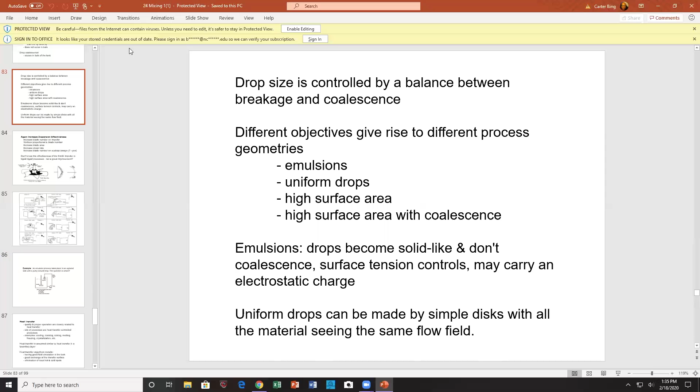Anyway, where was I? Uniform drops made by simple disks - all the material sees the same flow field. I have these vortices here, and I still have my high-speed jet, so I may have some disruption of drops in here. I don't know exactly how drops will deform with these vortices. Hopefully there's still this high-speed jet here, which I suspect there probably will be.

So I'm looking at increased blade number. That effect is 0.4 power. The idea is vortices proportional to blade number. I'm interested in blade area, shear rates. Is blade number increased on scale up? I hope so.

Think about a 4-inch diameter impeller with 6 blades - there you go, it's nice. Or maybe a 6-inch impeller with 6 blades, that seems reasonable. But stop to think about it - if I scale up to a 3-foot diameter impeller and still have 6 blades, my question would be, are you nuts? So blade number will increase.

Spacing distance - the minimum spacing distance should be twice the blade width. I have this blade width, the next blade should be 2 blade widths down, even more than that. But certainly with a larger diameter disc here, I would certainly increase the blade number.

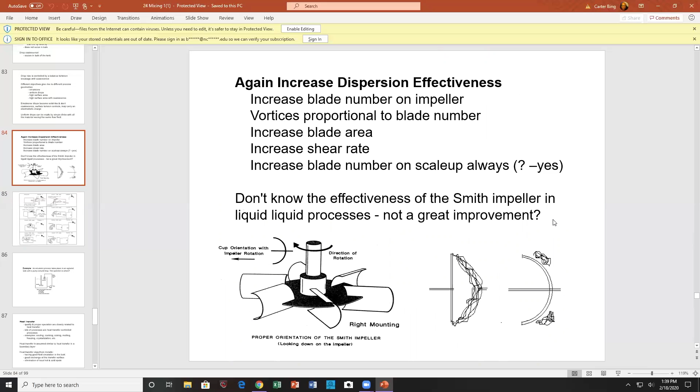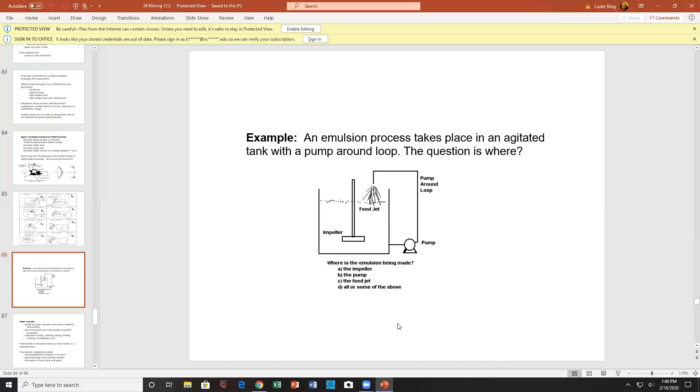So there you go, blade number. Well, I don't know the effectiveness of the Smith impeller in liquid-liquid processes - not a great improvement. Of course we have our famous question here: where's the emulsion being produced? Remember this impeller is what, 500, maybe 300 RPM? This pump is going around at 1700 RPM or 3600 RPM. So I may want to do all kinds of stuff with that pump, see if that's affecting my emulsion.

Heat transfer. Oh yes, heat transfer. Quality and proper operation are closely related to heat transfer. Lots of processes are heat transfer control processes - examples: cooling, cooking, coking, melting, freezing, crystallization. Heat transfer is assumed to be similar - heat transfer in a boundary layer.

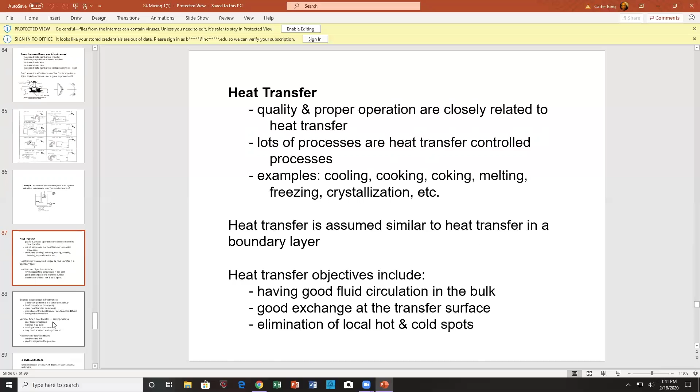That means heat transfer correlations that you have for boundary layers are used for agitated tanks. Well, you typically have a big difference because in heat transfer in agitated tanks, you have a D over T ratio that has to be accounted for. You're looking for good fluid motion, good circulation in the bulk, good exchange at the heat transfer surface, eliminating hot and cold spots. Scale up issue with heat transfer - dead zones form, lower heat transfer coefficients. The prediction of heat transfer coefficients is difficult.

Fouling also increases. So you have the famous equation by George Klinzing, University of Pittsburgh - nice guy, really like him a lot. Laminar flow plus heat transfer equals many problems: poor liquid circulation, material may burn, heating elements overheat. You may need scrape wall equipment - oh geez, I never heard of scrape wall equipment.

You use scrape wall equipment all the time in the kitchen. Whenever you have heat transfer, hopefully when you're cooking your food, you're using a flat spatula to scrape the wall, the pan, the bottom of the pan, to keep your food from burning. So one of the interesting things about process physics is the physics in the kitchen is the same as the physics in your plant. I thought that was pretty fun.

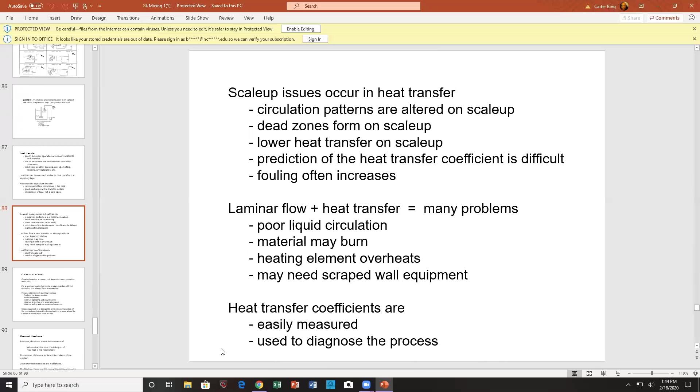Heat transfer coefficients are easily measured or monitored. It tells you when to perhaps clean your tanks. It's also used as a diagnostic method for your process. Your mother or father measured your temperature while you were sick - same idea as measuring the temperature of your process with heat transfer, understanding your process with heat transfer measurements.

Chemical reactors - it is amazing how sophisticated we are and how poor reactor design is actually done. I thought it was quite interesting how advanced we are. At some point, perfectly back mixed and plug flow reactors are going to hopefully be replaced by better determination of what the physics is actually occurring in your process. There's nothing wrong with those as a baseline, and again they should be taught, but they should not be taken as simple - that's all there is - because there's a whole bunch more.

Okay, reaction. For a reaction, you got to bring the reactants together, and without the mixing and contacting, there is no reaction. You want to have the desired product, maximize the product, minimize operating and recycle costs, minimize impurities and separation costs, and minimize safety and environmental issues.

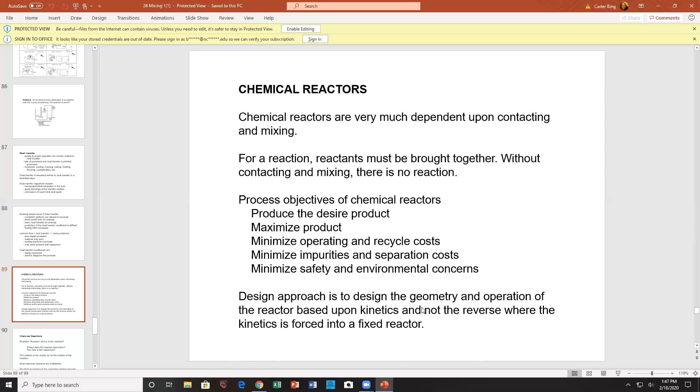So what you want to do is look at the kinetics and see which reactions you want to minimize and which you want to maximize. Then you design the contacting to match how you're going to add the material together and how you're going to separate it. So you're much more attuned to matching the kinetics to the process, rather than just forcing it into a single stirred tank reactor and hoping for the best. That's not a good way of doing reactor design.

So what is it that we want? Well, the first big question is reaction - where does the reaction take place, and how fast is that reaction? Now, I always like to point this out: the volume of the reactor is not the volume of the reaction.

I sat there through reaction kinetics with Dr. Liu at the University of Pittsburgh when I was 21 years old, and I didn't believe it then.

Anyway, most reactions are multi-phase. Fluid mechanics and contacting phase become important. So if we take a standard reaction, we have what I'd consider my standard reactor, whereas I have a feed plume here.

The reaction could be at the surface area of that feed plume. There's nothing that says it can't be there. Or even worse, it reacts back up the pipe, where the reaction rate is faster than the feed, so you have back reaction up the feed pipe. That is really dangerous.

That's why the Japanese lost World War II in the Pacific. They had all these gasoline tanks and gasoline lines sitting on the top surface of their aircraft carriers, and they didn't back purge the gasoline out of these feed pipes. So when the bombs of the U.S. Navy bombed the surface of these aircraft carriers, the gasoline lines back reacted to the gasoline storage tank. In a matter of 3 or 4 bombs, the aircraft carrier exploded or was severely damaged.

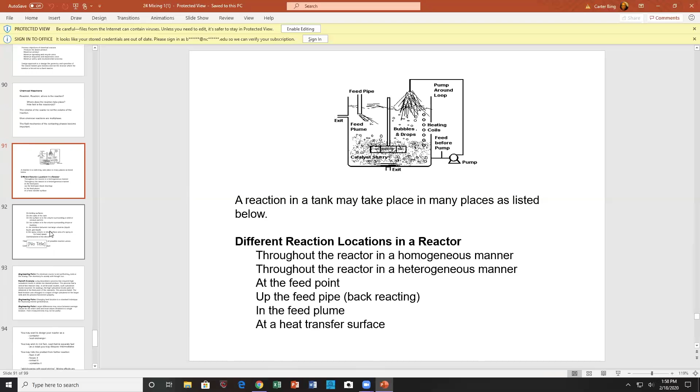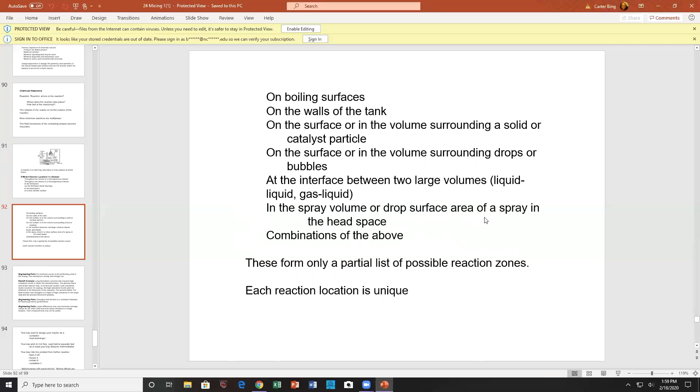Reaction, where's the reaction? This is only a partial list of the reaction zones: boiling surface, walls of the tank - that's why you put glass on walls, surface to volume - solid catalyst, surface of solids or catalyst particles, surface volume surrounding bubbles and drops, interfaces between two large volumes, that can happen. Spray volume, drop size, headspace gas coming in setting off the reaction perhaps, drop surface area of a spray - all kinds of places.

Reaction, where's the reaction? 93: the chemical reactor is not performing well, you need to look at the contacting or the mixing. It's been my experience that chemists are extremely competent, their chemistry is usually very well thought out. So we had a case at - I won't tell you the company, but it's a big company.

Basically, at small scale and large scale, they didn't have the same flow conditions. So Doug Leng recognized that, came in, changed feed locations, and voila, he turned around the reactor. Everybody was pleased. Think of what that does to your reputation. You walk in, say move this pipe over here a couple feet, and suddenly the reactor performs quite well. Changing feed locations is a standard technique in my business. Just think, right out of the blue, change feed locations, and everything is wonderful.